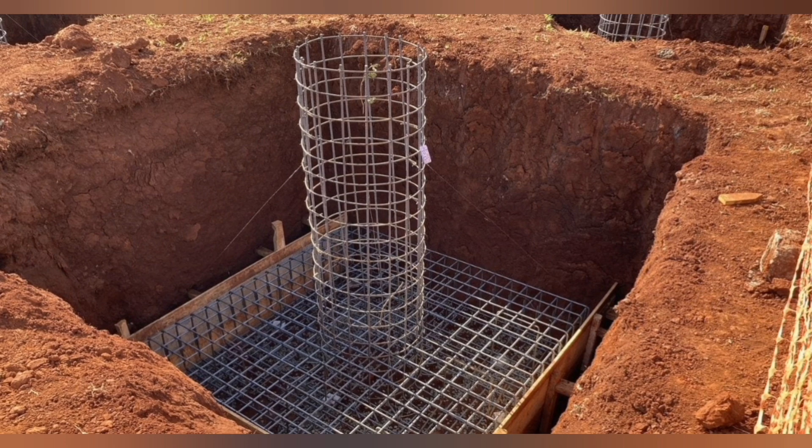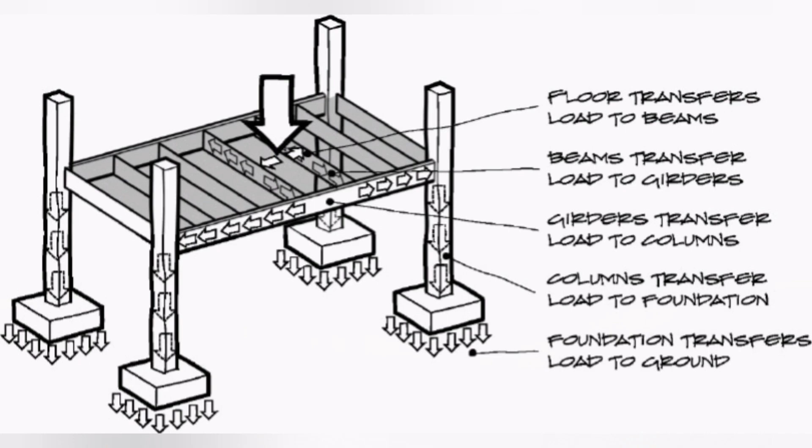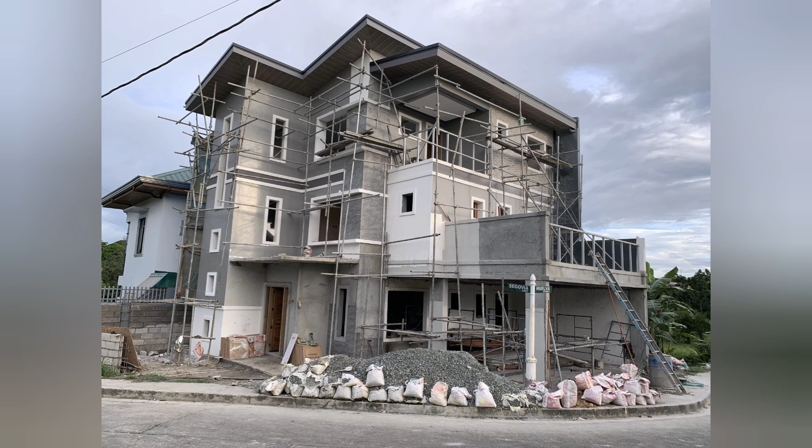What is isolated footing? An isolated footing, also known as a pad footing, is a type of shallow foundation used to support individual columns or pillars. It is designed to distribute the load of the structure evenly to the soil, ensuring stability and preventing excessive settlement. Isolated footings are commonly used in buildings, bridges, and other structures where columns are spaced relatively far apart.

Details of isolated footing. 1. Shape and size. Isolated footings are typically square, rectangular, or circular in shape. The size of the footing depends on the load from the column, the bearing capacity of the soil, and the depth of the foundation.

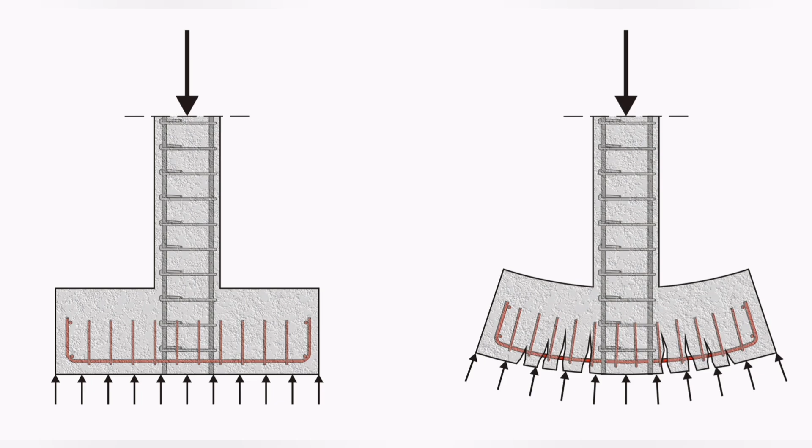2. Components. The column transfers the load from the superstructure to the footing. The footing base spreads the load over a larger area of soil. Reinforcement steel bars are used to strengthen the footing and prevent cracking.

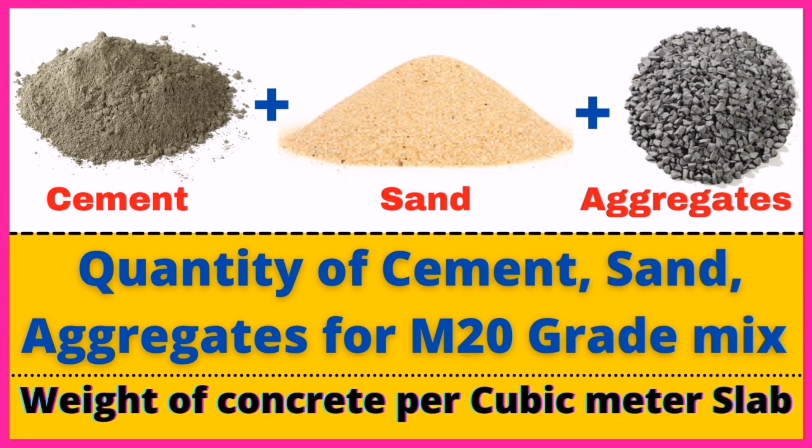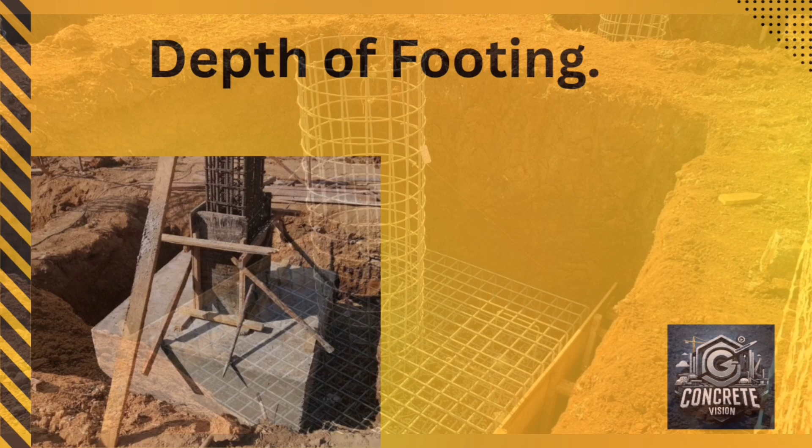3. Materials. Concrete, usually M20 or M25 grade, is used for the footing. Reinforcement steel, Fe 415 or Fe 500, is embedded in the concrete. 4. Depth. The depth of the footing depends on the soil type, groundwater level, and frost depth in cold regions.

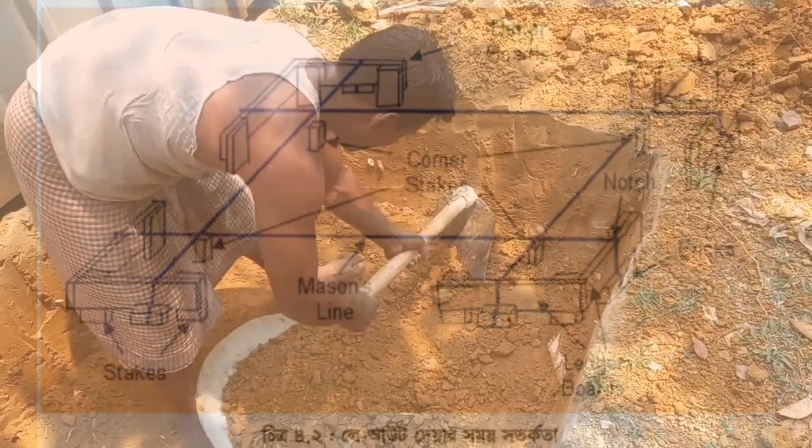Work process of isolated footing. 1. Site preparation. Clear the construction site and level the ground. Mark the locations of the columns and footings using surveying tools.

2. Excavation. Excavate the soil to the required depth as per the design. Ensure the excavation is level and free from loose soil.

3. Formwork installation. Install wooden or steel formwork to define the shape and size of the footing.

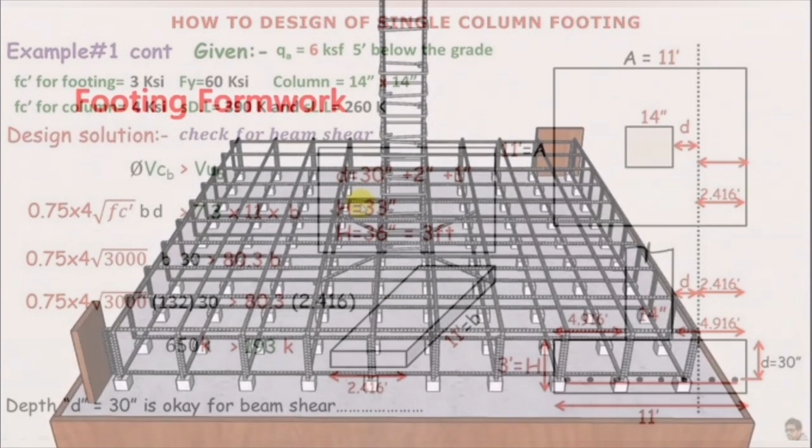4. Reinforcement placement. Place the reinforcement bars, as per the design, in the excavated area. Use spacers to ensure proper cover for the reinforcement.

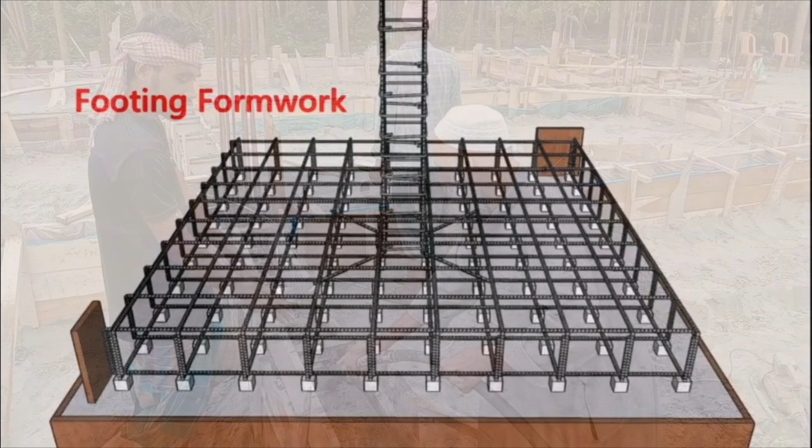5. Concrete pouring. Pour concrete into the formwork and compact it using vibrators to remove air bubbles. Ensure the concrete is evenly distributed and leveled.

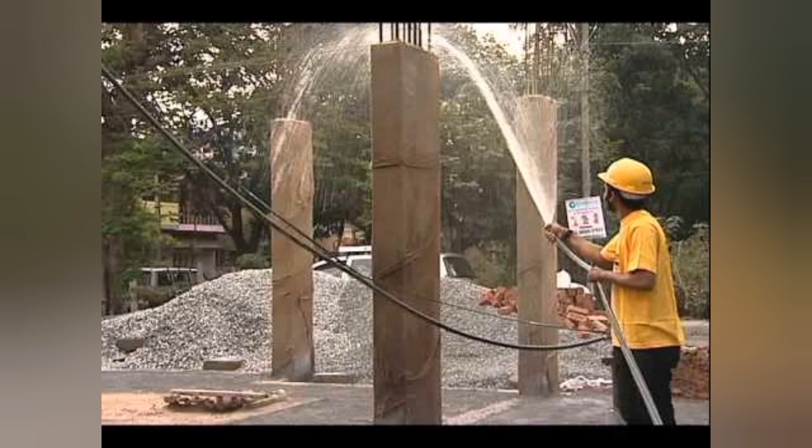6. Curing. Cure the concrete for at least 7 days to achieve the desired strength. Keep the concrete moist by covering it with wet gunny bags or using curing compounds.

7. Removal of formwork. After the concrete has gained sufficient strength, remove the formwork. 8. Backfilling. Backfill the excavated area around the footing with soil and compact it.

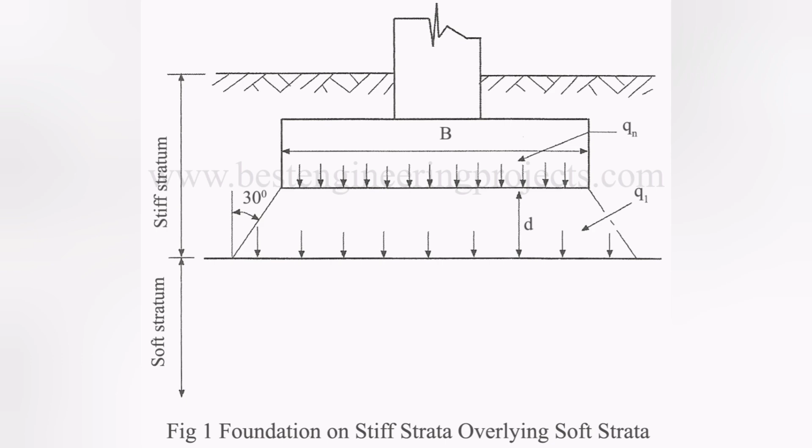How isolated footing works as a foundation. 1. Load distribution. The column transfers the load from the superstructure to the footing. The footing spreads the load over a larger area of soil, reducing the pressure on the soil. 2. Stability. The footing prevents excessive settlement by ensuring the load does not exceed the bearing capacity of the soil.

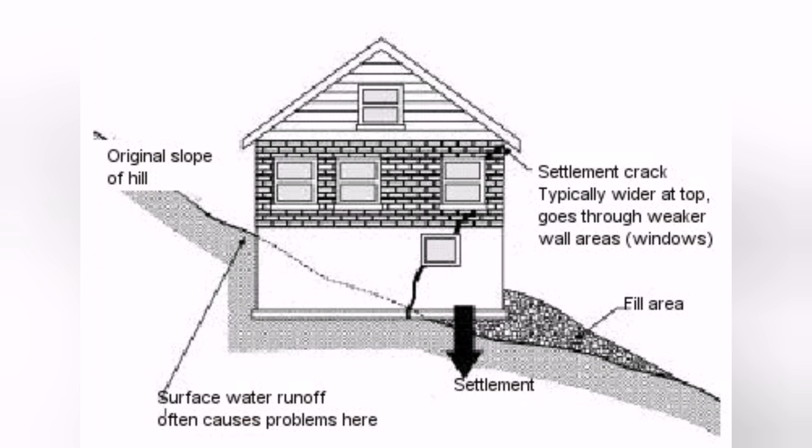3. Prevention of differential settlement. Isolated footings are designed to ensure uniform settlement across all columns, preventing structural damage. 4. Resistance to uplift and lateral forces. Properly designed footings resist uplift forces, due to wind or seismic activity, and lateral forces.

Advantages of isolated footing: economical for low-rise buildings, easy to construct and requires less excavation, suitable for good soil conditions with high bearing capacity.

Disadvantages of isolated footing: not suitable for weak or expansive soils, requires careful design to avoid differential settlement, and limited to structures with widely spaced columns.

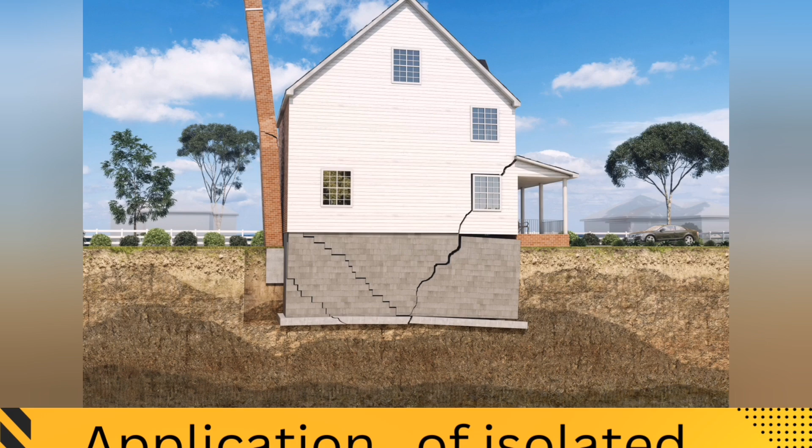Applications: residential buildings, industrial structures, bridges and culverts, towers and poles. By following the above process and understanding its function, isolated footings provide a reliable and cost-effective foundation solution for many structures.